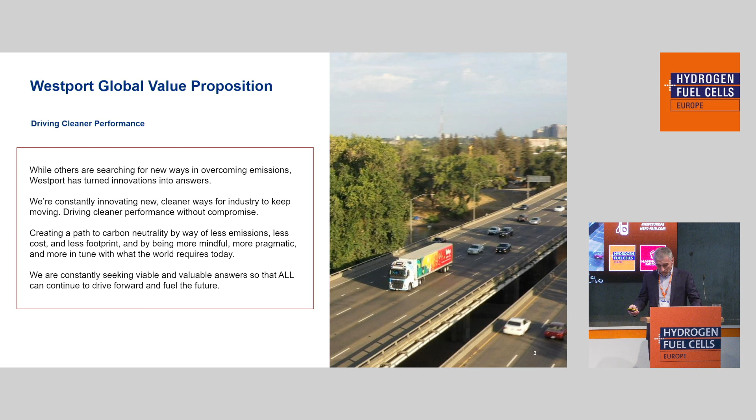So we have more than 60 years of experience in innovation. We have more than 1,400 patents protecting our products, our technologies, and our systems. I would say that innovation is in our DNA, especially in alternative fuel systems. We are a global company. Our headquarters is in Vancouver, in Canada. We have manufacturing locations in multiple countries. We have a presence in North America, in South America, in Europe, in India, and in China as well.

So we have a very wide range of products. And with this range of products, we can address the needs and the requirements of various segments of the market, starting from passenger cars, light-duty commercial vehicles, up to medium and heavy-duty ones, and passing through industrial applications as well. So we have a product offering covering different alternative fuels. As I said, we are specialized in alternative fuels, generally speaking, LPG, CNG, LNG, and hydrogen as well. And the last one is the reason we are here in this exhibition.

So far, I've highlighted who we are. So now, this picture best shows where we come from. Westport grew over time with the mergers and acquisitions of multiple companies that nowadays are brands in our organization. And each of these brands is keeping their experience from the past in their specific fuel, in their specific field. And this is why and how we now have the know-how needed to address different markets, different segments of the market, with different fuels and with different technologies as well.

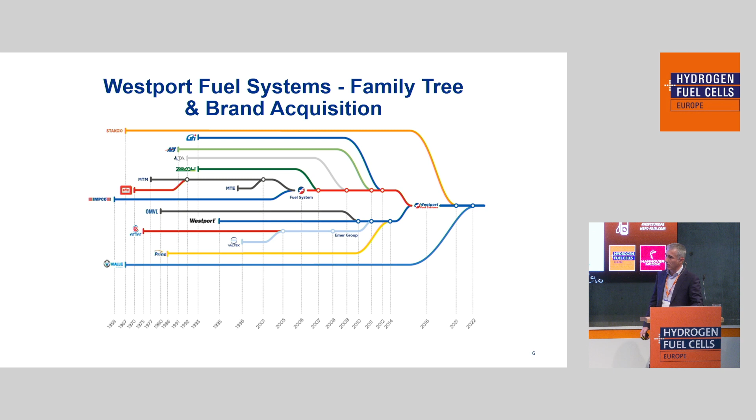So the most relevant of these brands is GFI, the second line. GFI is the brand that basically combines all the products that belong to the hydrogen fuel system components product line. GFI has a long, demonstrated history in high pressure components. So, quite an overall picture describing who we are and where we are now.

I will not go into the details of this picture, but we have a fully comprehensive product portfolio, embedding products for different fuels, as I said, LPG, CNG, LNG, and hydrogen, and addressing the requirements of different parts of the system itself, from the storage to the high pressure, down to the low pressure part of the system through regulators and electronics as well. And this is what I wanted to highlight here, that we can and we do supply components for hydrogen fuel systems, but also systems as well. And we have the capability to develop systems and to provide turnkey solutions as well.

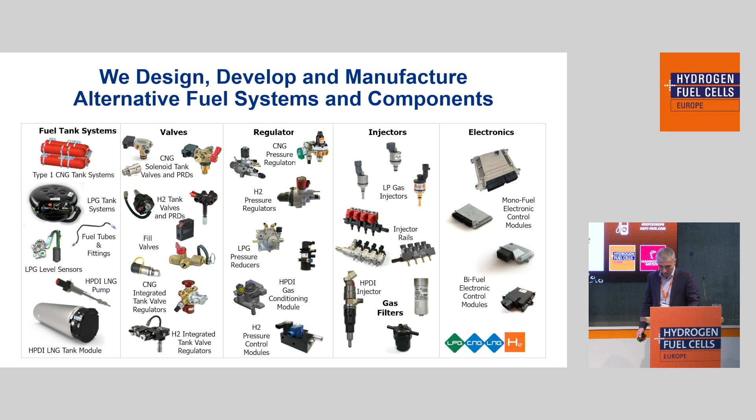And now specifically to hydrogen fuel, as that's the reason we are at this event, the GFI brand is the one that is, as I said, embedding all our products belonging to the hydrogen components family. So we have a very wide range of products. All of them, let me highlight, are able to address the needs of hydrogen fuel systems for both fuel cell and hydrogen internal combustion engines as well.

Just mentioning the families of this product portfolio: we have tank valves, we have safety devices in the high pressure part of the system, we have high pressure regulators, and downstream in the low pressure part of the system, we have solenoid shut-off valves, we have electronic pressure control valves and electronic pressure control modules.

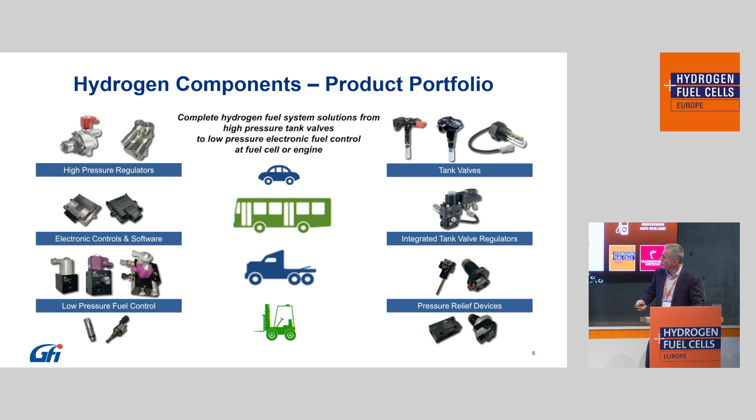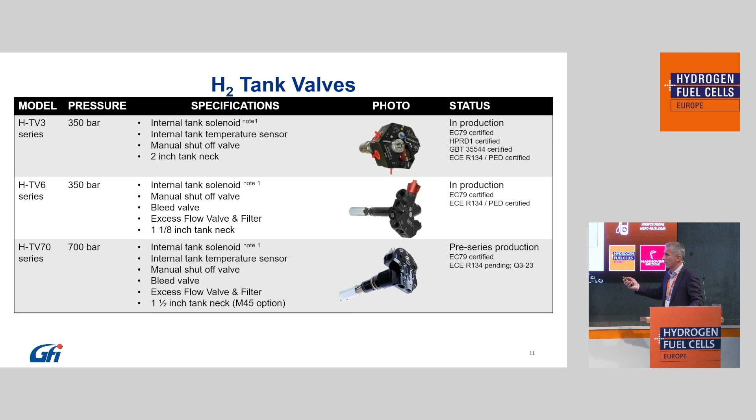So quickly going through the product line as we are running out of time, so I will be quick for the next slide. Hydrogen tank valves: we have products in our product range at 350 bar that have been in production for years, so with a long history and demonstrated capability, and 700 bar, which is the next stage of our development. So we have integrated tank valve regulators, we have pressure safety devices, we have high pressure regulators,

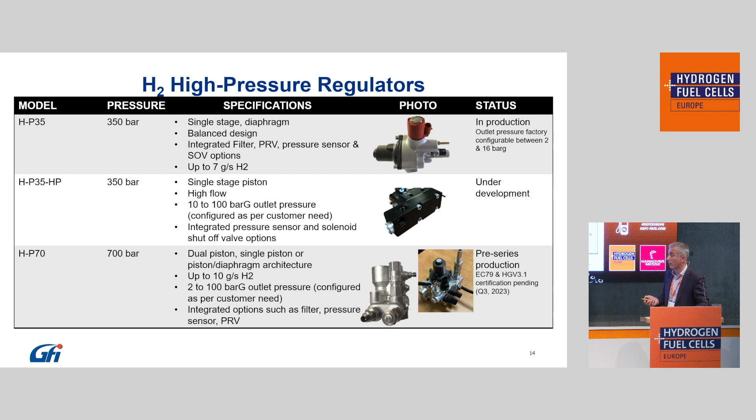as I said, also in this case 350 bar, single stage diaphragm version, and 700 bar, dual piston or piston and diaphragm architecture. So we have various different configurations in the 700 bar, and all of them are driven by the specific requirements from our customers. And down to the low pressure, we have, as I said, pressure control valve and pressure control module.

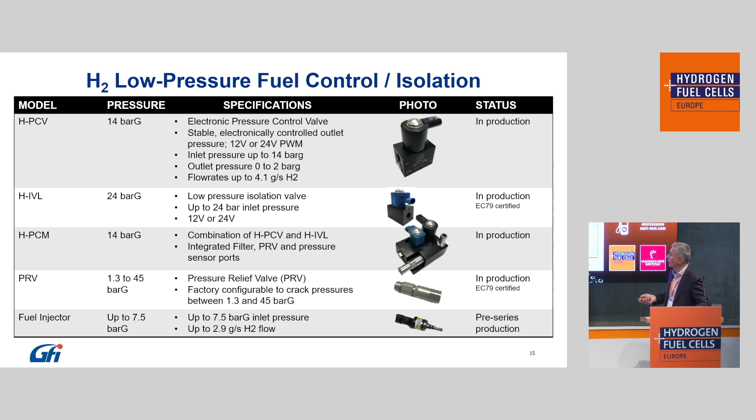Now, so far, I have described our capability, our know-how in terms of components, but as I stated, we also have the competence in systems. So here is where and why I would like to introduce the hydrogen HPDI technology. That is a technology that is protected by multiple patents and has been developed through the years by Westport Fuel Systems. HPDI stands for high pressure direct injection of gas into a combustion chamber. So we are talking about an internal combustion engine.

This is done through an initial pilot injection of a small quantity of diesel fuel that will be ignited by the compression. So we have a compression ignition engine. The same injector will be able also to inject a relevant quantity of gas fuel, gas that will be ignited by the pilot injection of diesel as well. So most of the power is coming from the gas.

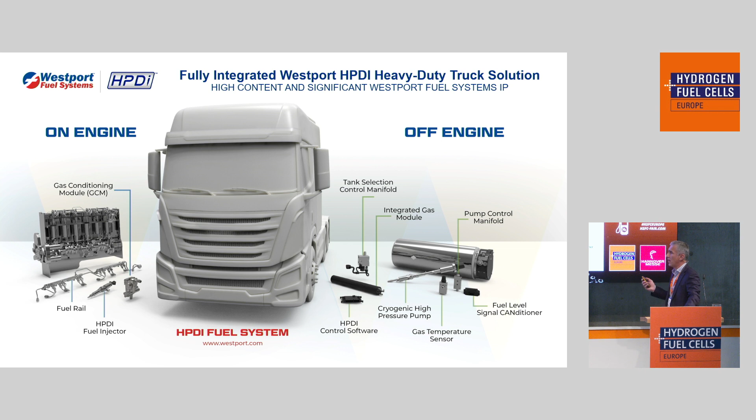And this is a typical diesel cycle engine with the typical high efficiency of the compression ignition engine. This system is in production. We have delivered more than 5,000 units to our customers and it is currently using natural gas. But now the point, why am I talking about a natural gas product in this kind of hydrogen environment? Again, as the evolution from the current product, the LNG HPDI, we can derive the hydrogen HPDI version.

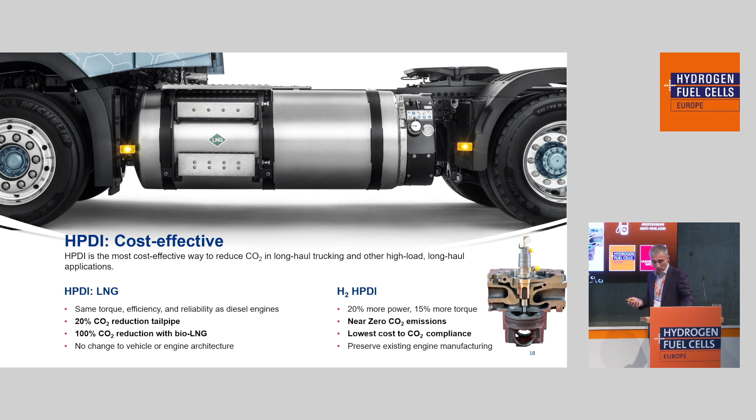So basically using similar technology with hydrogen as fuel, we can get even higher than diesel efficiency with near zero CO2 emissions and with a very low total cost of ownership. So in Westport, we believe in the hydrogen HPDI as a game changer, and it's a value proposition. The hydrogen HPDI can give a second life to the internal combustion engine, with a near zero CO2 emission solution, with a cost-effective solution, and finally with a best-in-class efficiency that has been demonstrated so far with samples and demo engines and vehicles of this technology.